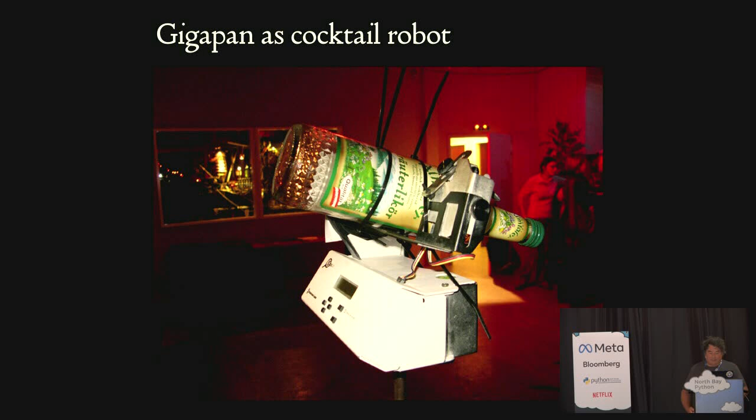I build robots. At the festival, I found a couple of zip ties and turned my very serious Gigapan photo robot into an almost functional shot-pouring robot. Cocktail robotics had captured me. And as a bonus, since Vienna is the capital of cocktail robotics, there's always a Wurst.

Cocktail robotics is not just pouring drinks.

Truth. I don't want to name names, but I have a different partner.

Robot is very loosely defined in cocktail robotics. So here are some examples and some ideas and some explorations.

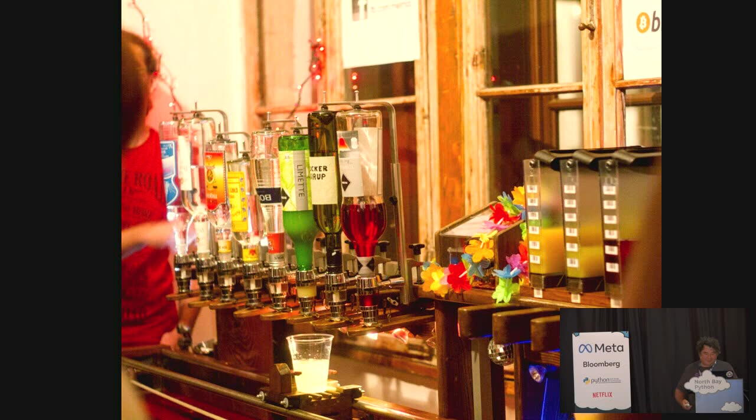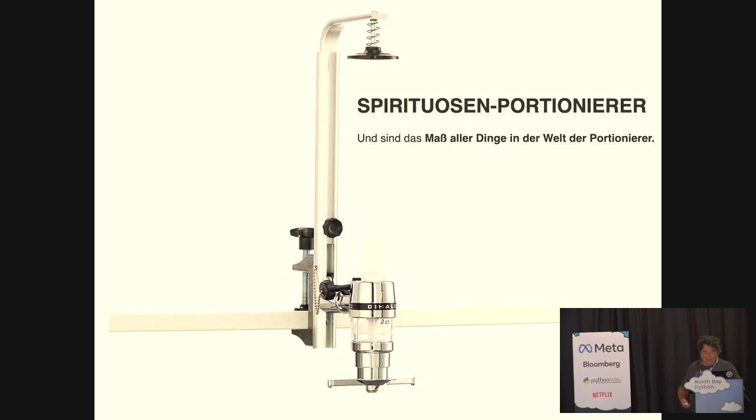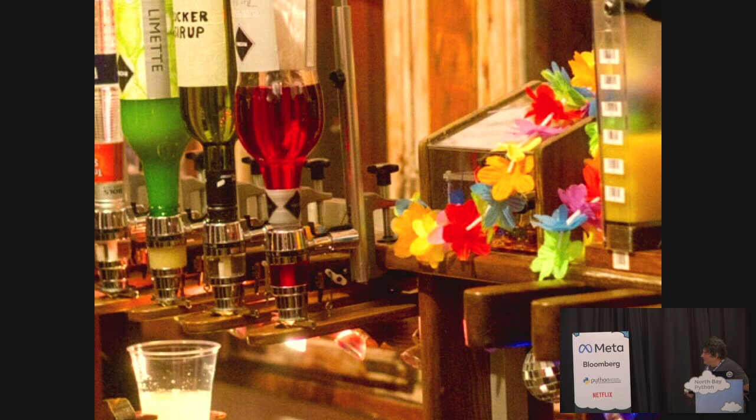The mysterious electrical machine for automated cocktail creation, or MELMAC. The drink slides on a trolley that moves under each bottle. It uses a manual Gehale Spirituosen-Portionierer, which holds the bottle securely, and when you push up against the lever, it dispenses 2 centiliters. So they automated this by mounting hobby servo motors to pull up a wooden paddle to push against the lever. If you look closely, you can see the servo motor in there.

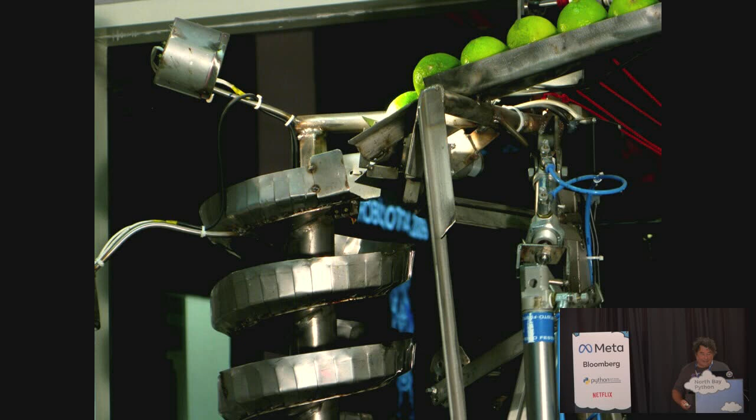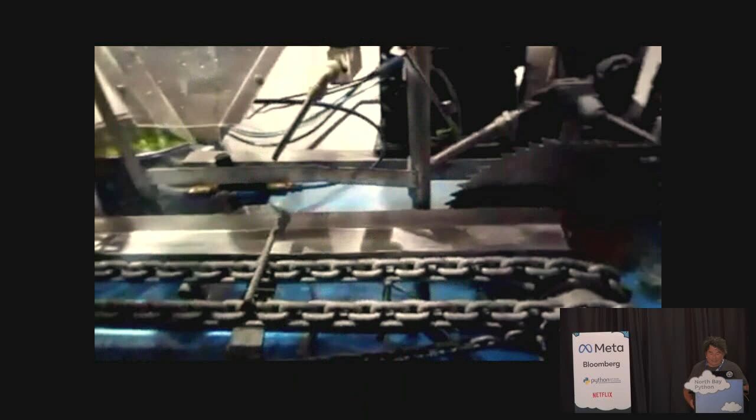It handles limes, it crushes limes, dispenses mint, squeezes it into the glass, adds sugar, and then, I don't know that you can hear this, but the clank, clank, stately progress of the glass down the chain drive to the muddler.

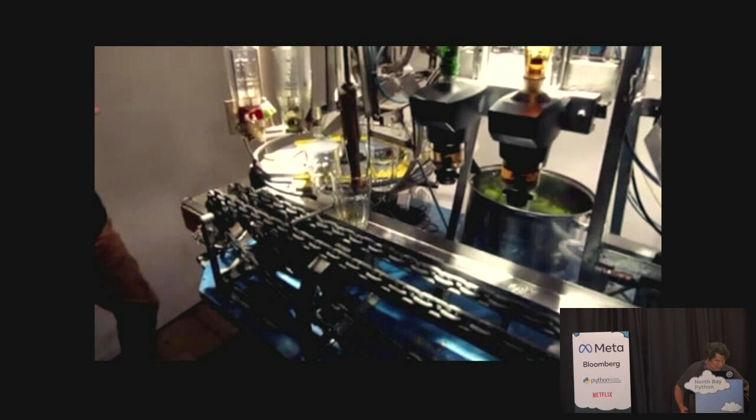May not have been able to hear, but you could see the slow progress. It adds liquor, more liquor. They're using these automated drink-a-mat dispensers, so they send a signal to them, and you get a measured amount. They're easy to connect to an Arduino or a Raspberry Pi.

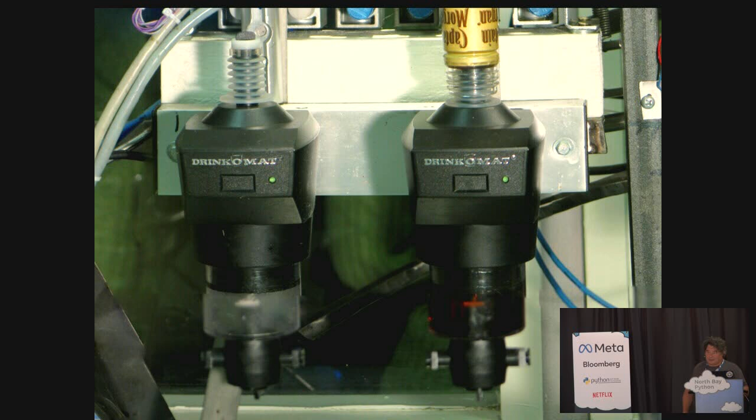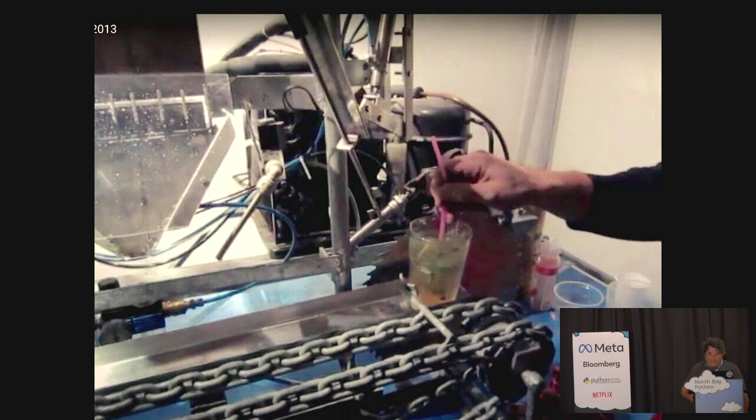And as you can see, this is the only simple part of this robot. Oh, of course, you need ice. You need soda water. You get your cocktail. But you don't always need electricity. The Corpse Reviver does a mechanical dance with bottles and levers to make its drink.

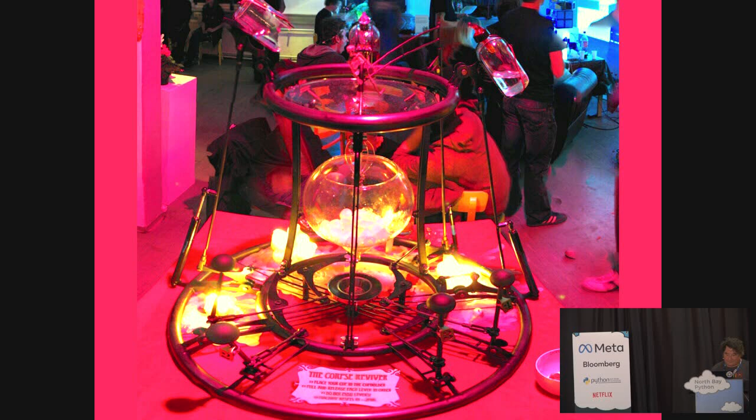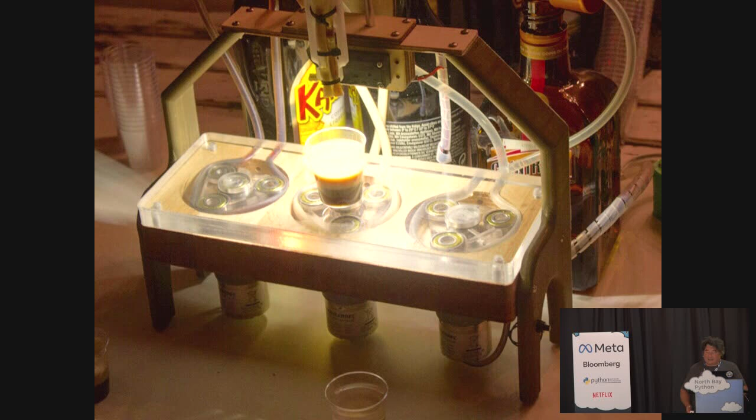But if you do want an electron-enabled device, peristaltic pumps are common. So the LayerBot uses bespoke peristaltic pumps to build its B-52s, with the distinct layers gently laid down by a dispenser from a 3D printer Z-axis that moves up the level to leave each layer undisturbed.

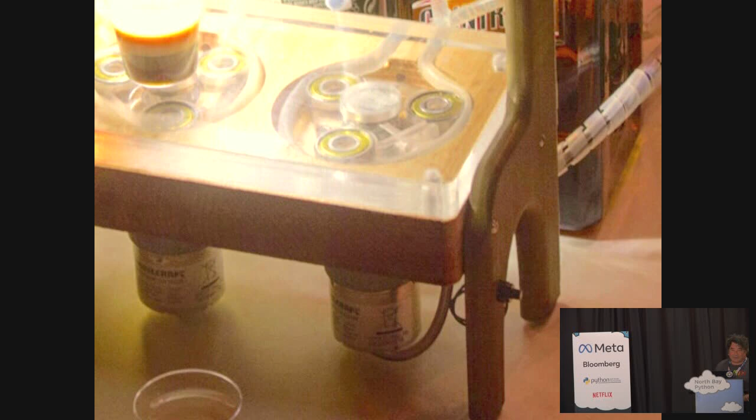Bernard used a small electric motor to drive these 3 bearings around within the laser-cut case. It's a jewel of design and performance, one of my favorite robots.

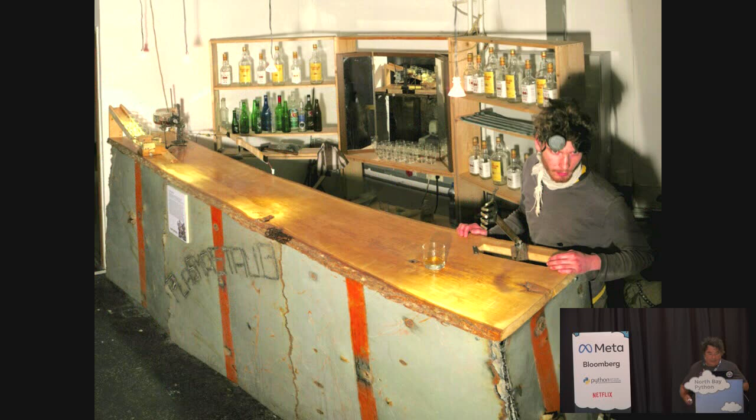But maybe you can go on a journey through time, or send you to the Old West, where you have to wrestle a robot.

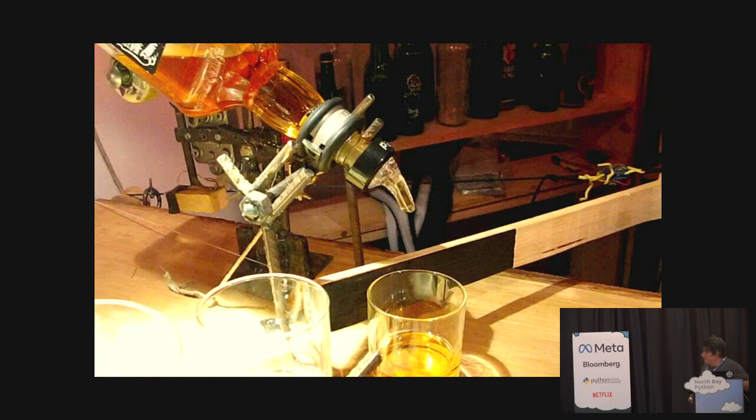There were issues in testing, apparently, with this paddle. Many drinks were lost.

I actually contributed some money, this was in 2009, to bring that whole group of Austrians, they were students of Johannes's, to San Francisco for the festival and the Barbot Festival that spring.

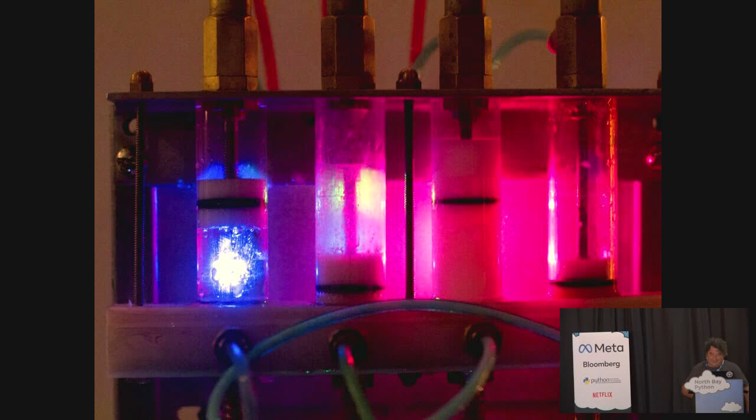So my piston bot used pneumatic linear actuators to drive piston pumps, and then the waste air drove 4 utterly annoying penny whistles for a bit of robot music.

There was a native German speaker who wrote all kinds of native German things, using the latest developments in electromechanical, pneumatic, and tactile musical controls allows for an exploration of the incremental value added to the cocktail production process. Also includes blinking lights.

The manifold was the most complicated thing that I had machined to that point. 4 holes in the top for the pumps, holes on the bottom for the intakes, on the sides. I didn't know how to do any of this when I started.

But cocktail robots provide a chance to explore new things. For example, getting yelled at and insulted by a robot until one feels the need to kick it in the groin. And then a nice young person gives you a Red Bull and vodka in a Solo cup. A new experience.

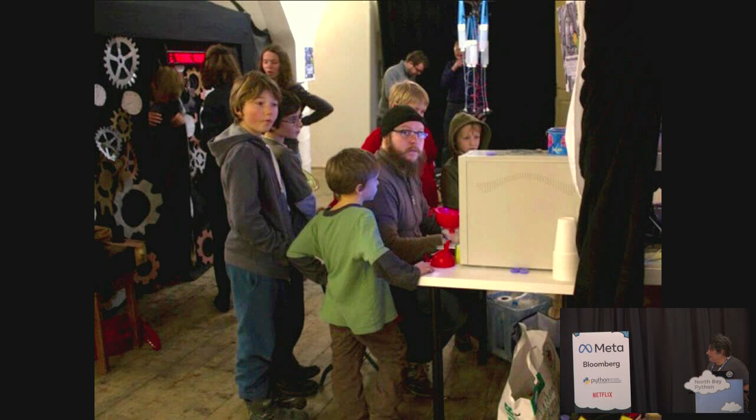And when you have a Minecraft cocktail robot, you will have kids. Europe has different attitudes about, well, many things.

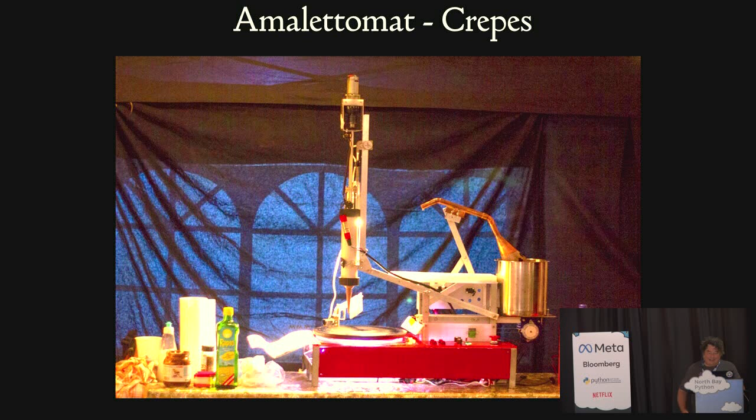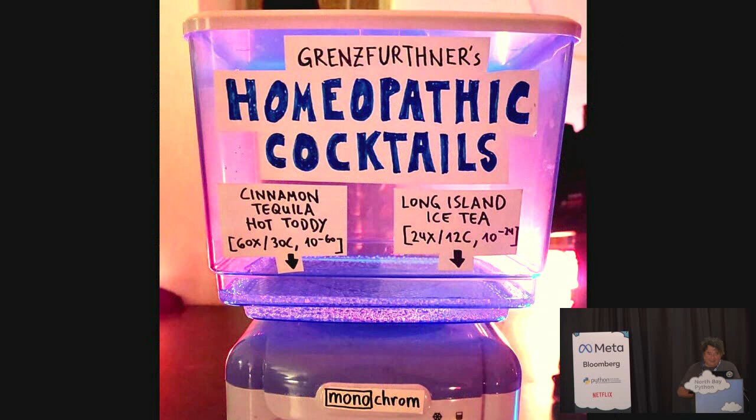I can't pronounce this very well, but the Amalettomat is the perfect crepes making machine. Alcohol-infused crepes. You can pull a switch to execute a hot dog that you can eat afterwards. Or even this counts.

Poor Hobot has two big problems. He is addicted to booze and broke as hell. For him to see his mechanical colleagues giving alcohol to foreigners all day long is not easy. Please help this homeless, homesick fellow by sparing him some change. So cocktail culture includes hitting you up for change.

Here's a robot that I like a lot, so we're going to explore it. Clearly the antithesis of the layer bot.

Robots once were built the old-fashioned way, one piece at a time, lovingly crafted with skill, blood, Arduinos, and found parts. This was originally built during a cocktail robot workshop in Vienna.

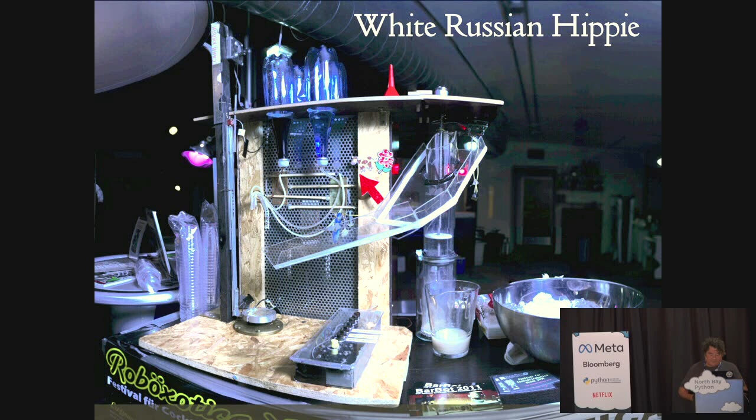It has 4 ingredients: vodka, Kahlua, milk, and soy milk, and makes White Russians, or what they call Hippie White Russians. It has a control panel from an old elevator, an arrow controlled by a servo motor to show if you're getting a normal or a hippie drink.

An ice auger with a pinball machine type spinner that confirms that an ice cube has been dispensed, and a weight sensor to detect if the glass is in place.

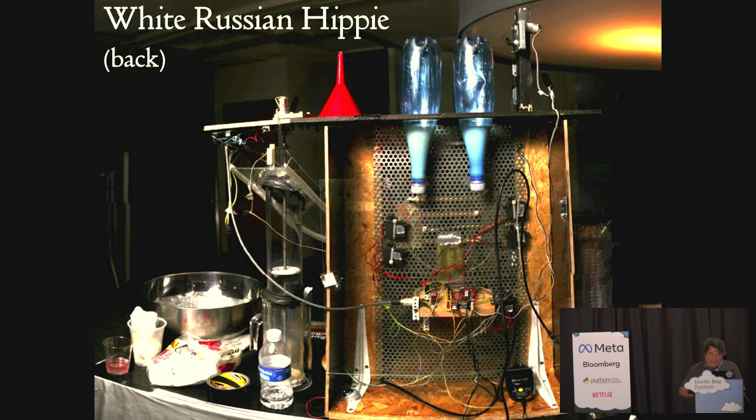So you look at this robot, this combination of well, a whole lot of technical things, 12 or so I/O pins on the Arduino, and yet it's put together with literally cable ties and duct tape.

There are multiple frames you can use when you explore cocktail robotics, but if you want robots that interact with people by reacting to buttons and sensors and create actions with lights and motors, then you're firmly in the world of physical computing. I think it's fair to describe physical computing as being where the artists who want to be roboticists and the roboticists who want to be artists meet.

When I was at NASA with the Gigapan unit, I had artist friends who described me as a pretty good engineer, and my engineer friends at NASA thought I was a pretty good artist. They were both wrong.

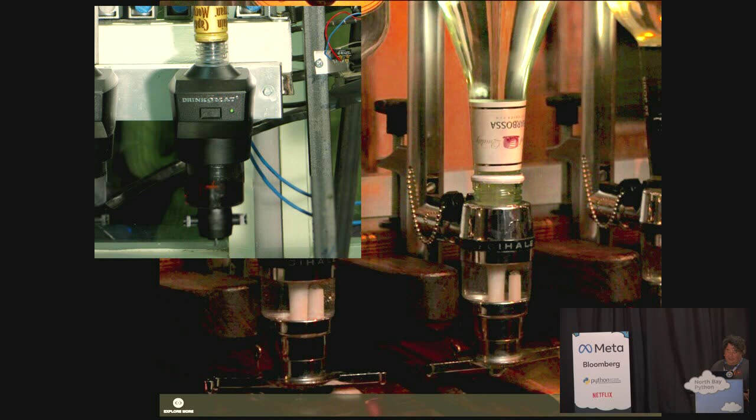Bartendro, which we will meet soon, is clearly the product of good roboticists and good software engineers, in a conflict of interest warning, friends. The Drinkomat dispensers on Robomoji, engineering and robotics. Using hobby servo motors on Melmac to pull up a beautifully finished wooden paddle to depress a manual dispenser, physical computing. Physical computing exists for people who want to mess with electronics but don't want to have to do too much math.

The White Russian Hippie screams physical computing. It does all this with about a dozen I/O pins.

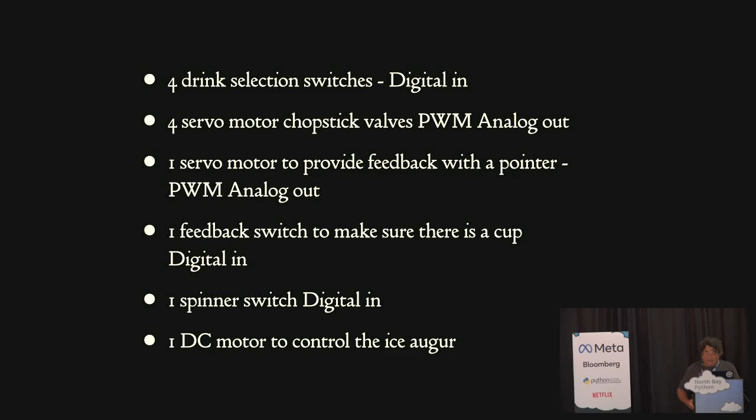Before the Arduino existed, I attended a couple of workshops by Tom Igoe on physical computing, and he said the hello world of physical computing is making an LED blink. Once you get that, you're golden. And at that time, 2003, 2002, the hobbyist microcontroller learning curve was very steep. Just getting an LED to blink was a challenge.

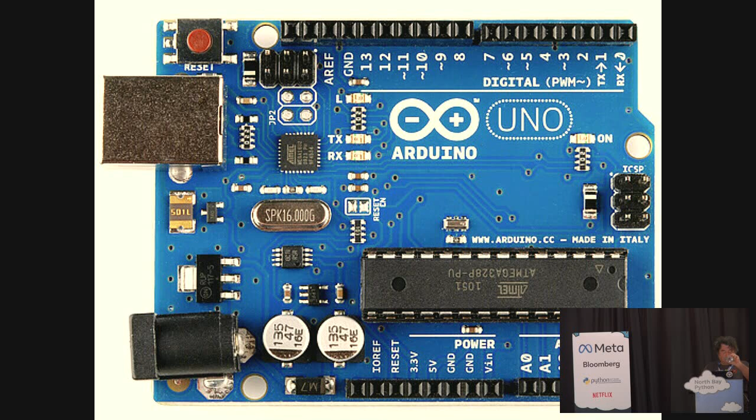The Arduino came out 2 or 3 years later, and you may or may not know, pin 13 is a digital out. You can use it for normal I/O, but also it's connected to an onboard LED. And when you first turn on an Arduino, it has a blink program built in, and the LED blinks. And I thought, damn, Tom was so right. And then I looked, and he was so right because he was part of the Arduino team.

Proving, as if it needed proving, Alan Kay's adage that the best way to predict the future is to invent it.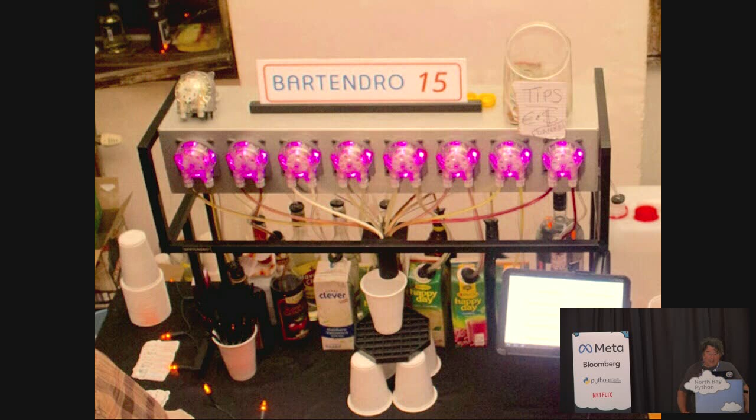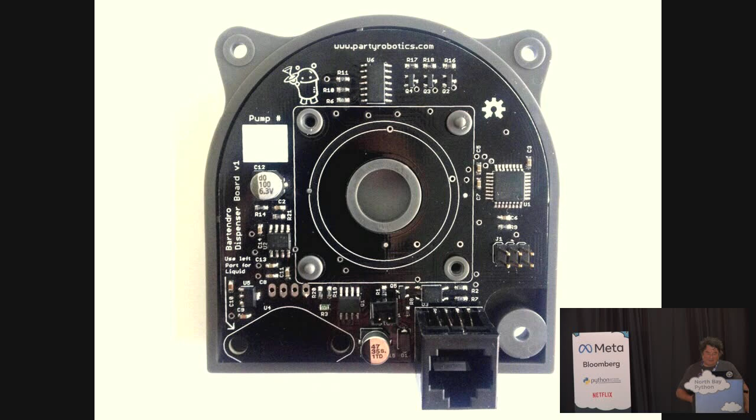Bartendro was an open source project to create a complete and reliable cocktail robot that could serve hundreds of cocktails in a night. And it worked well. Still does for the people who have it. They made open source custom dispensers that had feedback and fine control of their peristaltic dispensers. They spent a great deal of effort on accuracy and precision.

They also wrote the Bartendro software using Python and Flask to manage recipes, track what ingredient is in which bottle, and provide a user-friendly interface to make cocktails. It also includes an API. So this decouples the interesting part of your robot, whatever your entertainment is, whatever your interactivity is, from the mechanics of making the drink appear.

So, right? This is... thank you.

Hello DrinkBot is a project to make it easier for people to get started with cocktail robots. The hello world of dispensing cocktails is: push a button, liquid comes out.

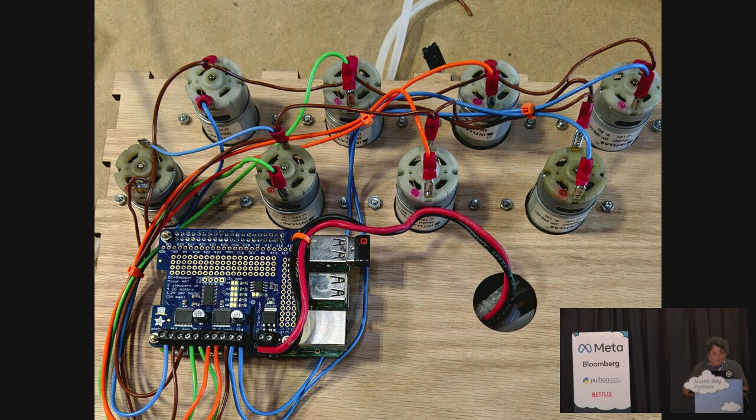I should have some to hand out, but there was a Raspberry Pi with an Adafruit motor shield. The motor shield can control 4 motors in forward and reverse, but I thought, wait a second, why don't I control 8 motors? You can't control 2 adjacent motors at the same time, because one's forward and one's reverse, but you can have 8 dispensers, which is cool.

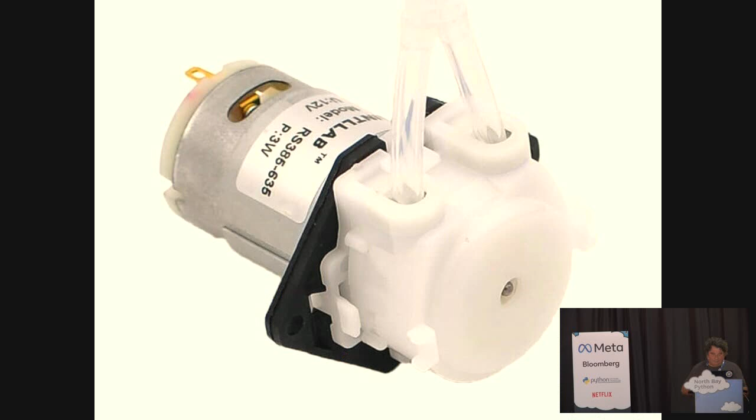The Bartendro software uses Bartendro pumps, and they're super nice and precise, but they're expensive. These aquarium dosing pumps aren't as precise or accurate as Bartendro pumps, but they're only $7 or $8 and 2 days shipping from Amazon. Or there's a jillion options from AliExpress for, well, really cheap.

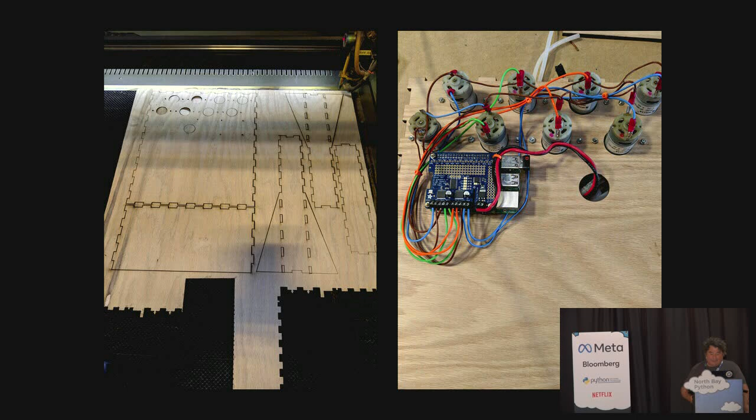The goal here is to get people thinking about and making their own cocktail robots. There's also software in the GitHub for additional games and whatever.

We applied for a booth in 2019 and it was accepted. Then they asked if I wanted to do a workshop on making cocktail robots. I think it was okay that I said yes, but oh my God, we had lots of people.

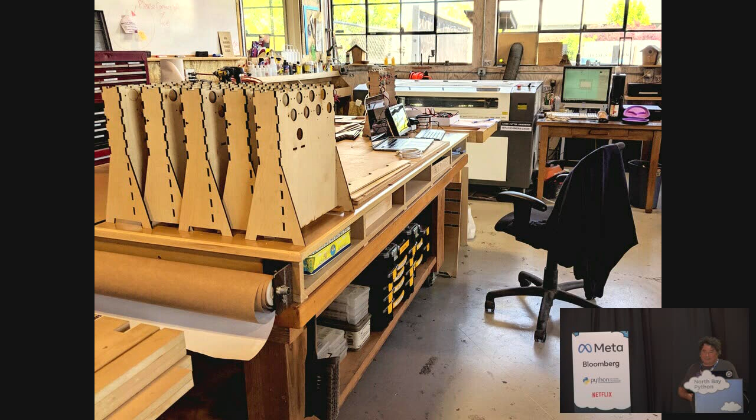These are robot cases that I cut and pre-fit together, then took apart for people to assemble. Buying parts for 20 Hello DrinkBots to do a workshop was a challenge. I look at this picture now from spring of 2019, and I wonder - I was able to just order 20 Raspberry Pis and own them.

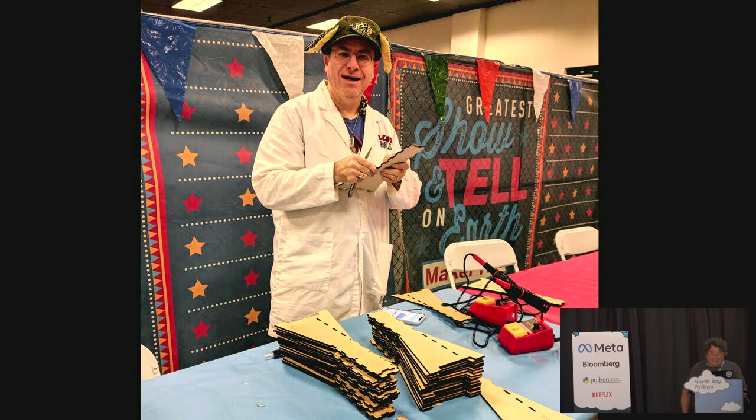So software can be frustrating as heck, but organizing a hardware workshop is pretty nerve-wracking. But the people who step up and help are the best. Keith Sattenfield came to Maker Faire and helped in the workshop. It was awesome - Maker Faire truly was, and maybe is again, I guess, the greatest show and tell on earth.

They tricked me into writing an article for Make, and I tricked them by slipping in a picture of my grandson with a robot we set up to make Italian sodas. Action at a distance is always a thrill, and the kids loved selecting their drinks, pushing a button, and having something happen.

Then, post-pandemic, the organizers of Roboexotica, the monochrom group in Vienna - for what it's worth, they also make films - in 2022 were invited to bring robots to the Fantastic Fest parties in Austin. So Christine and I got the call in July, and immediately we got to work. We had help.

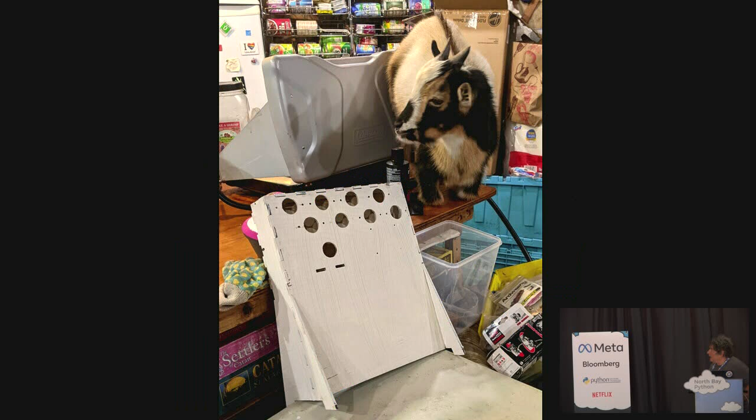We made a lot of robots. I was worried that they weren't going to be able to bring enough robots to Austria. It's a lot of robots.

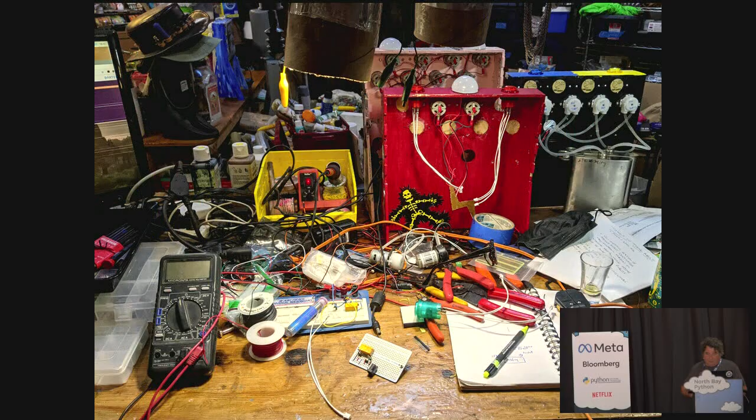Packing - turns out that ice chests are legal luggage, and they work great for travel. So we put 6 robots and 2 ice chests with extra parts in our luggage. Here were some robots. So many. Here was the classic whiskey cocktail robot.

Just to be clear, anything that looks well-designed or pretty was Christine. I'm not joking - you saw the earlier pictures of Hello DrinkBots. They were ugly. They're still ugly in their physical shape, but not ugly... stark. So many robots operate on the principle that it's not-

The amazing thing about the dancing bear isn't that he dances poorly, but that he dances at all. But Christine is a bartender, so in addition to her artistic and creative skills, she brought a focus on the cocktails actually tasting good.

We used the Bartendro stock interface. The point of this robot wasn't the interactivity - the point of the robot was that they'll taste good.

Bonus points if you catch this reference - this is Ukrainian roulette. 1 or 2 people press a button, the robot makes a choice, and each person gets either a reasonably tasty drink or something wretched. The shocking robot: you hold an electrode, push a button, and it shocks you.

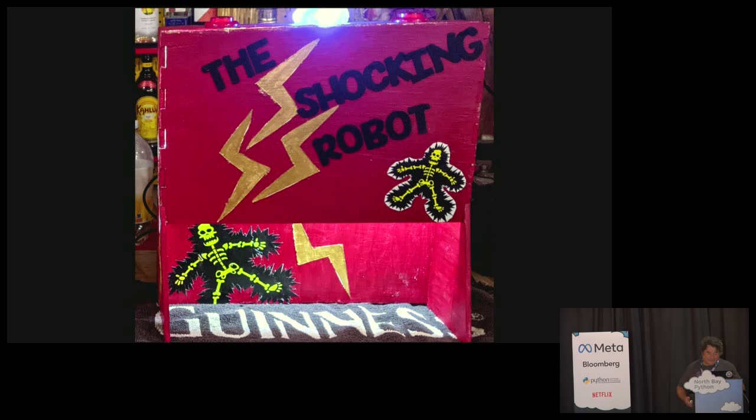As long as you hold the button, it also dispenses a drink. The intensity increases the longer you hold the electrode. It is a home version of Skinner operant conditioning.

The music mixer, this is an example that you should remember to take pictures. We had a xylophone, you'd hit notes, and each note would map to a dispenser. It worked, except ambient noise, the background noise, was a problem. So Christine filled it with complementary ingredients, and we made ambient cocktails. It was cool.

I've made multiple versions of the Dude Imbibes. This is the third one. You probably can guess, this place has class. Wow, that's Bender saying this place has class. This was, again, at the Fantastic Fest party.

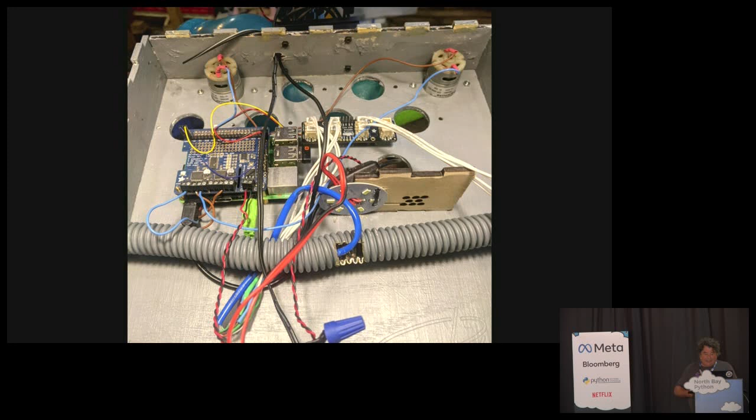I tried to get my former coworkers excited about making robots, and a former coworker said she wanted one that made martinis, just martinis. So somehow, probably again because of Christine, we settled on a Bender robot. We went through various name choices, but this one stuck. The insides are ugly, but you have choices.

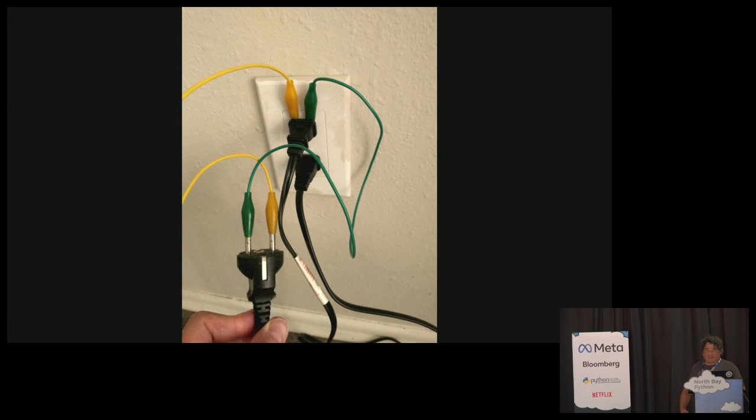Traveling with Austrians is, well, I would like to be judgmental, but I have a picture of doing the exact same thing in Europe.

We went to Roboexotica in 2022, and we smartly only brought the shocking robot and the classic cocktail robot. But Christine scoured Naschmarkt to get the right mint and other ingredients for her infusions. Sadly, COVID visited us, but amazingly, the next night, the shocking robot operated without any assistance other than a person putting new liquor in. It was great.

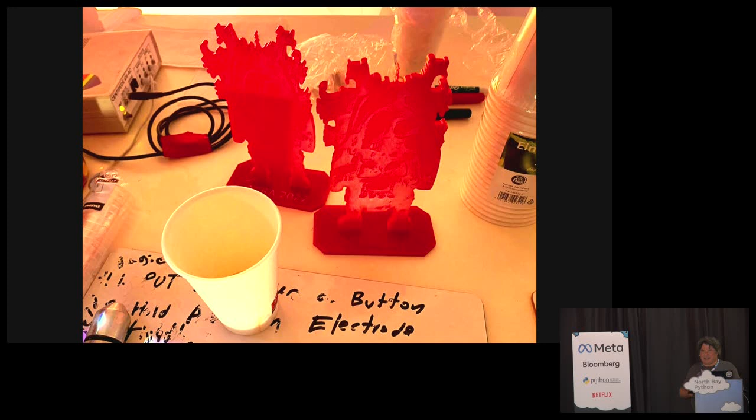And we won awards, the annual Cocktail Robot Award, the ACRA. We won the Balls of Steel Award, which I think they made up on the spot. And Classic Whiskey Cocktails won a Legacy Award.

Last year I didn't get to go to Roboexotica, but a friend, like a month before the contest, said, I want a robot that gives you a bird quiz and gives you more alcohol the more questions you get right. And so I wrote a quiz in Flask, in Python. I guess I should emphasize the Python first.

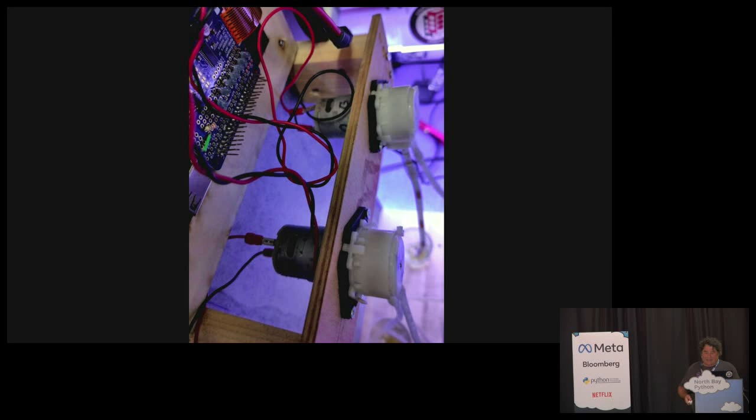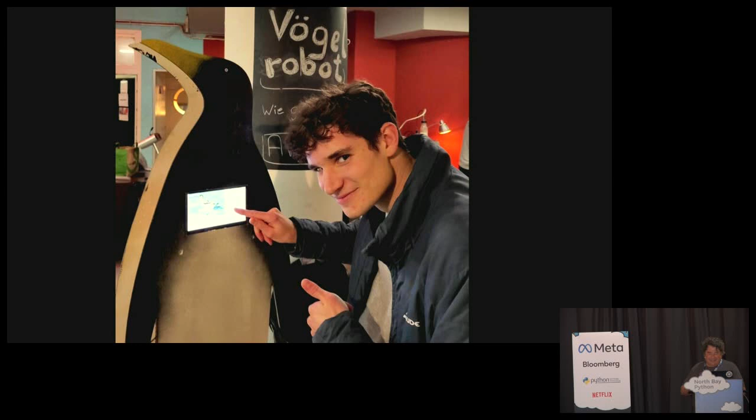Then sent them pumps and everything all pre-connected. I was so nervous, but fortunately, we had a second-generation cocktail roboteer. This is the son of the crate maker, and he helped. It was cool, look at that.

I even had like a welcome screen and a quiz that the design nerds in you are going to hate me for, but that's fine. More slides, more slides. Another great robot. It was happy.

So, in addition to being whimsical, cocktail robots can be serious. Bre Pettis came, was an artist in residence for monochrom in, I think, 2008.

And his project was to use a RepRap to print shot glasses. If you do 3D printing and you hear 2008 and RepRap, you know nothing good is going to happen. It failed in the most horrendous manner. So he said that, and had two friends, and made MakerBot.

Rob Kaye, who did Bartendro with other people, used a genetic algorithm to pick the optimal ingredients for his 7-pump Bartendro. And the interesting thing there is the amount of things you can do and learn.

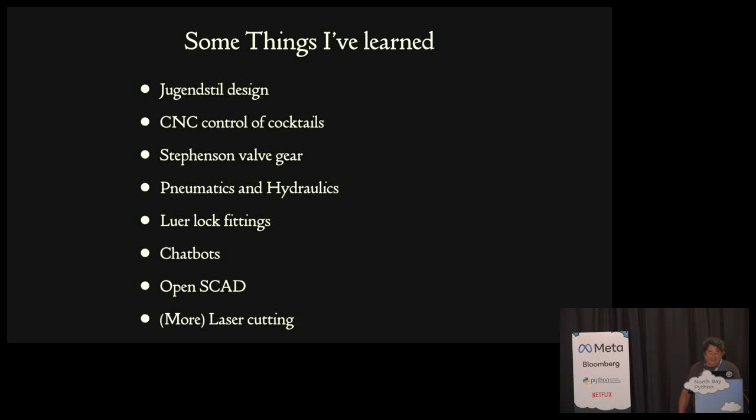I think it's cool. This is some of the stuff I've learned. I owe at least part of my appreciation of Jugendstil design, my understanding of Stephenson valve gear linkages, and my knowledge that screw whip exists, all to the cocktail robots.

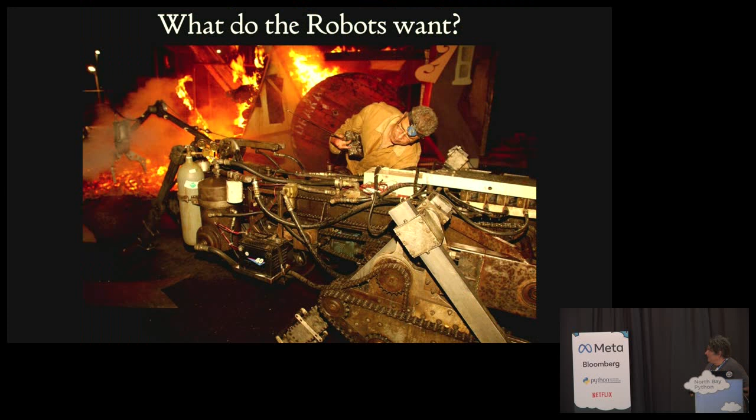Oh yeah, what do the robots want? This is Mark Pauline's Survival Research Lab. And I think what they want is maybe to be impaled. This is why AI is not going to take over the world.

And I wrote a colophon, which you'll see in the talk. Yay.

First example. Oh, that's fine. I mean, we run late. We run late here, that's how it works.

First example I've ever seen of Flask being used to be able to fill a flask.